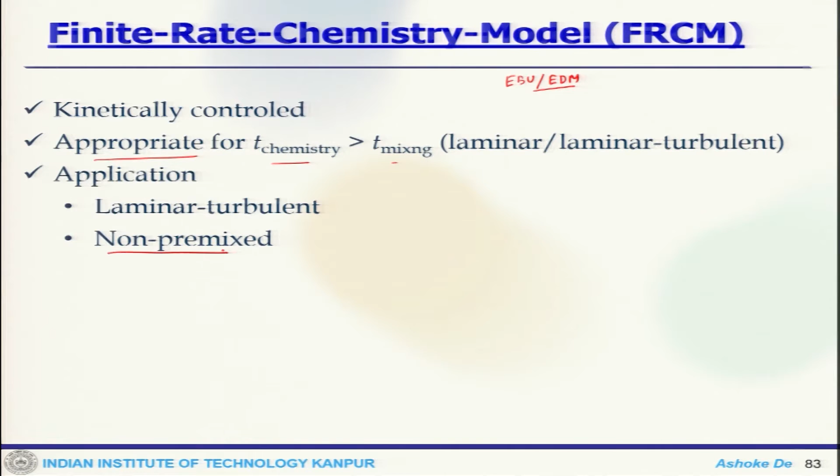Here there is an approximation if the chemistry time is higher than the mixing time, that means it becomes a laminar or laminar-turbulent interaction kind of situation. Now one can think about the applicability. It can be used in non-premixed mode, laminar case or turbulent case, either situation this is applicable. And the source term uses the Arrhenius expression.

We use the mean values for the temperature in the Arrhenius expression, but importantly in this case the effect of turbulent fluctuations are ignored. So this is one thing which would be missing when we actually close the source term.

Also when you look at the local temperature, that is also quite low. So compared to the previous models, these are some of the issues that come up here, that it does not account for those things. And also the consideration of non-equilibrium effects and all these things are also sort of missing.

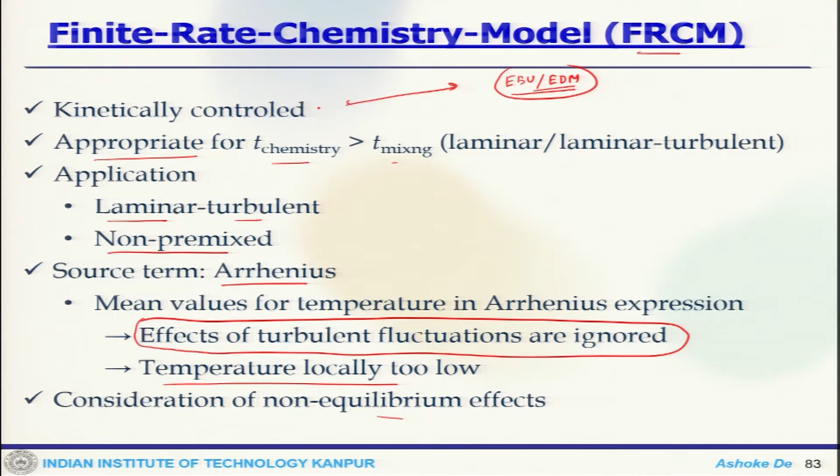So we have looked at the issues of EBU and EDM, and now EDM is more mixing controlled, FRCM is kinetically controlled. So these two are sort of contradicting each other. Now if one actually combines these two, that would probably be the best possible combination, which can be used for the application. So that is why we talk about this combination of EDM and FRCM.

So then we can use it for turbulent flow with high turbulence and intense mixing, and also if you have a laminar structure, that can be handled easily, because now we are trying to take the advantage of both these two models. So essentially the advantage of these two models are going to be used to somehow get this closed.

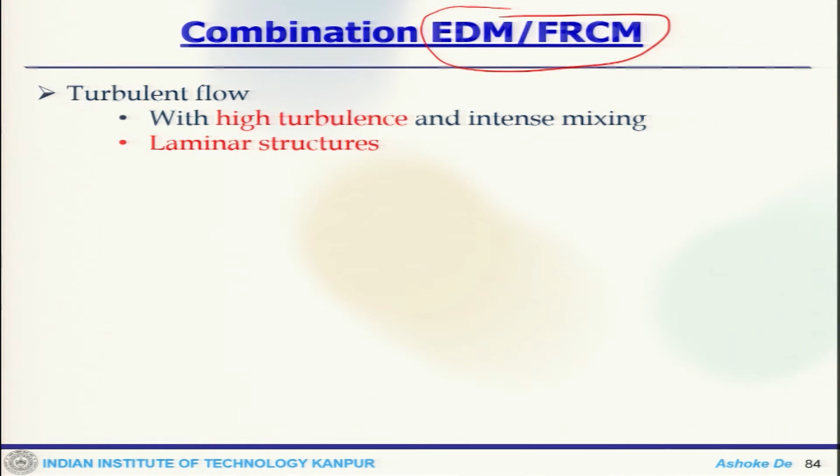Now when you combine these things, for each cell the computation for both the reaction rates are done. That means one is the reaction rate using EDM and the reaction rate using FRCM. Then we actually look at the smaller one to determine the reaction rate, picking the minimum or smaller of between the EDM and FRCM.

Then we look at the local chemistry and mixing control situation, which will allow us to choose what is supposed to be added along with this reaction source term, to take the advantage of whether it is a kinetically controlled situation or a mixing control situation.

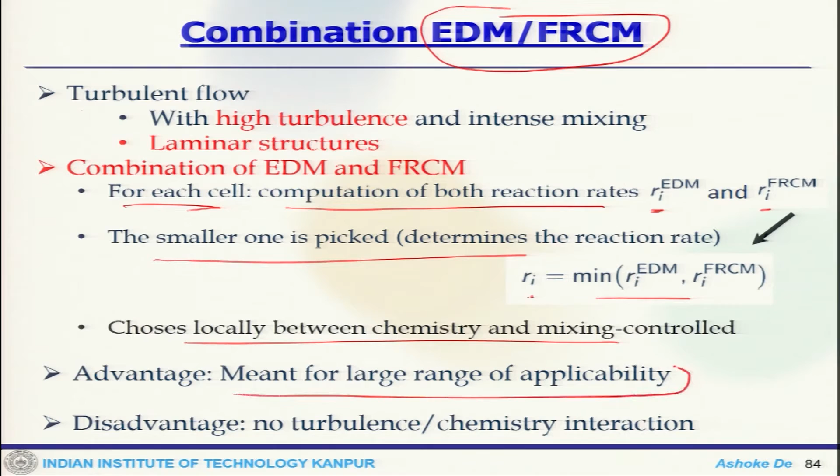So there are obviously some advantages and obviously you also pay some price. There is a large range of applicability. This is one of the biggest advantages, that once the applicability range or application range increases, that would be one of the best things one would expect to have.

But the other disadvantage is that there is no turbulence chemistry interaction. So though we are coupling these two models and taking the advantage of these two, there still remain some issues.

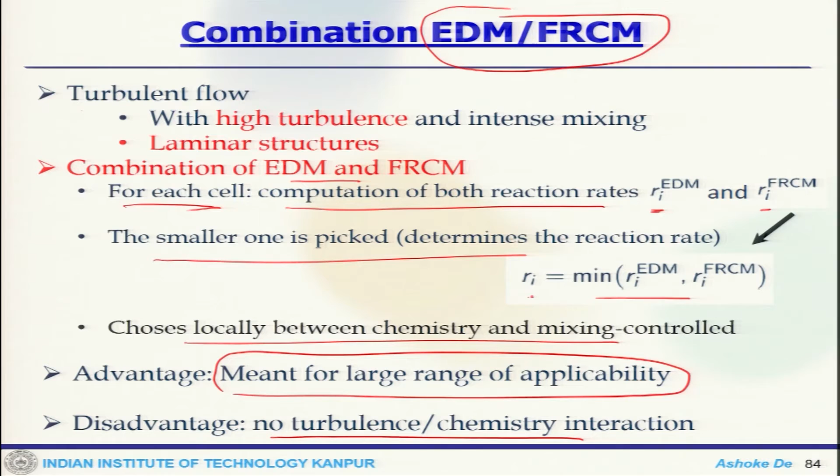So then the further modification which was proposed is the eddy dissipation concept, which is an extension of the EDM, where it does not take into account detailed chemistry, but now EDC can consider detailed reaction kinetics. That means it can take multi-step reaction chemistry into consideration.

So what it does is, if you have a computational cell like this, then you divide that into a small section. This is your reaction zone and this is your mixing area. So the cell is divided into two segments: one is the reaction zone, which is a fine scale structure, and the reactions are happening on the small scale, which is called the fine scale, and that is estimated like this. These are the C epsilon, the model constant, and the volume of the cell would be xi cube.

Reaction rates are determined by the Arrhenius reaction, because that takes into account all the detailed chemistry, and then the time scale of the reaction, which is also estimated as tau, given by C tau into nu by epsilon square root of that. This is also a model constant.

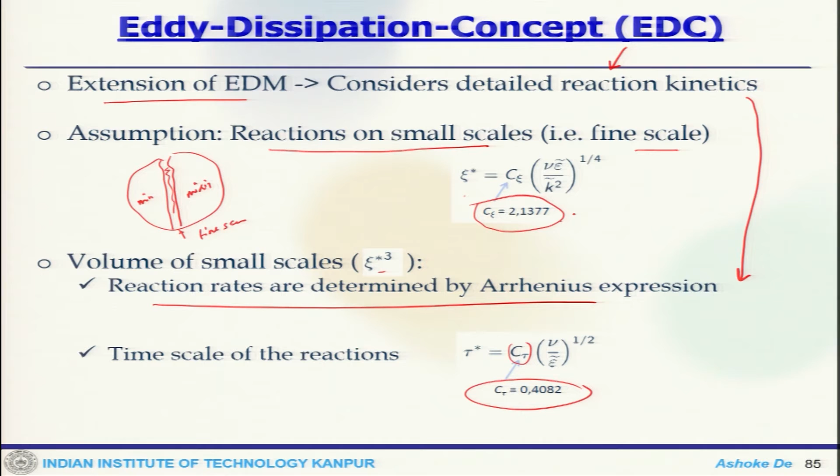These are the constants which are default model constants, originally proposed by the EDC model, but later it has been shown by different researchers that this requires some tuning depending on the particular application. More or less these constants work well for a large range of applications, but at the same time this can fail for specific applications that one has to deal with.

Once you have this, you need the boundary and initial conditions for the reactions. One assumption is that you have a constant pressure situation, that is, isobaric combustion, and then you need initial conditions which are quite important, for temperature and the species mass fraction or molar concentration, whatever it is.

Then we need the reaction time scale and then the numerical integration. One of the algorithms proposed by Pope is the ISAT algorithm, which is quite efficient when you get this numerical integration.

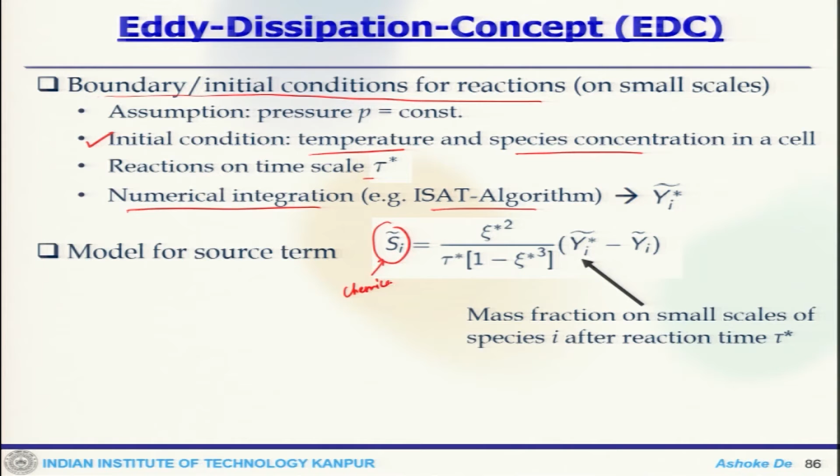Still, if you look at it globally, this has a huge advantage from the application point of view. It can be applied to premix case, non-premix case, or partially premix case, but it has problems when someone applies it using detailed kinetics and all these things.

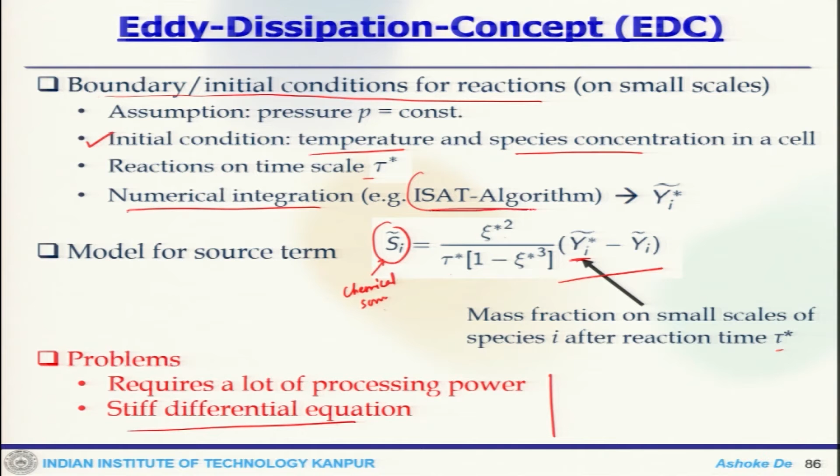Obviously when you use more detailed kinetics, your computational power requirement goes up, so the resource requirement becomes quite high. At the same time, integration of the reaction source term will lead to stiff differential equations when we try to integrate the species mass fraction. But there are ways to handle it, because these days computational power is quite handy due to advancement in architecture, though the differential equation solver remains an area of concern where the ISAT algorithm has been found quite effective.

Now, if we pull up the discussion of this first part, where we first look at laminar finite rate, the major issue here is that turbulence is not considered, and the reaction source term calculation is made by the Arrhenius equation.

Now if you go to finite rate or eddy dissipation, there again we use the Arrhenius expression for calculation of the source term, and we calculate the mixing rate - this is a local choice whether laminar or turbulent, depending on that it is used. Primarily in eddy dissipation, this is solely calculation of mixing rate - here kinetics is not considered, so this case is mixing controlled. Then finally we get the eddy dissipation concept, where the actual interaction between turbulence and chemistry is taken into consideration, and detailed chemistry can be used.

All said and done, this looks quite advantageous, and the applicability is also quite high because one can use this particular model irrespective of mode of combustion. The reason is it solves for individual mass transport equations, so that gives you simple models.

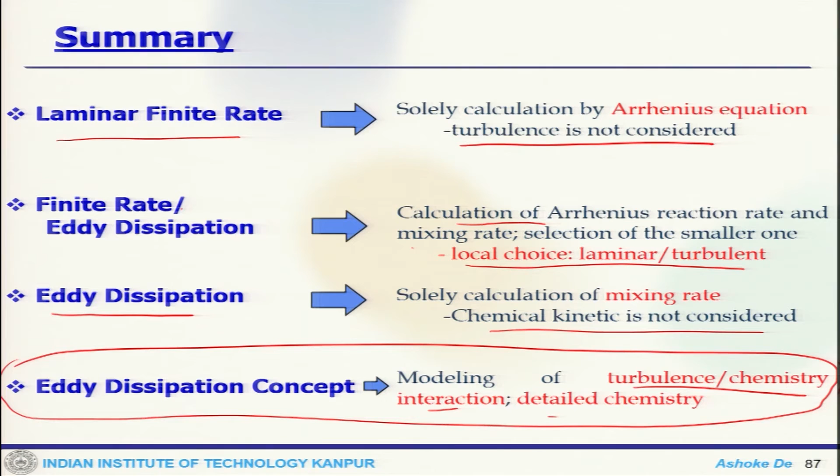Now we can look at slightly advanced models which are statistical based methods - that would be also quite handy. These models we discuss here can theoretically be applied to any mode of combustion, but with some advantages and disadvantages, whereas others are very specific to a particular mode of combustion.

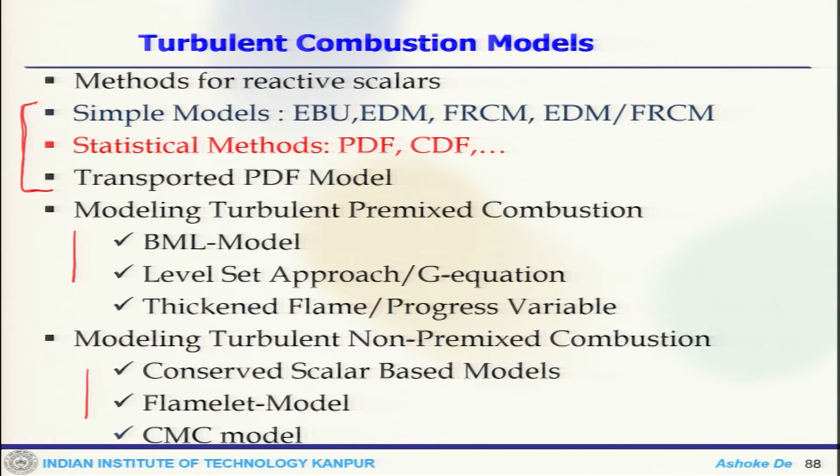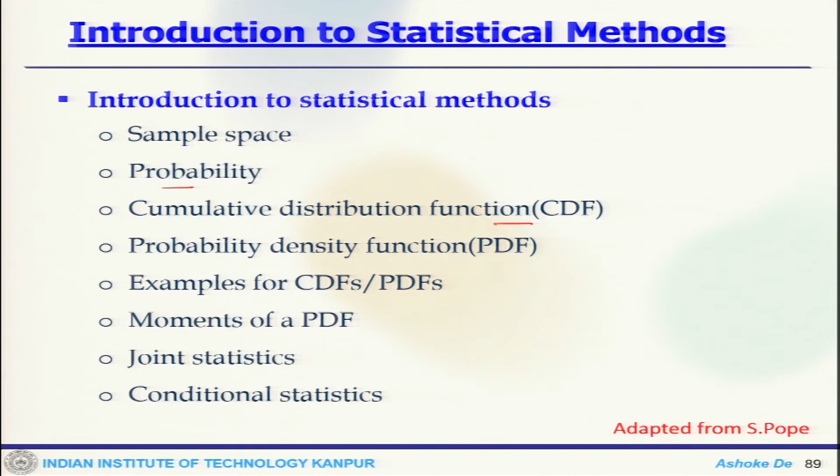Now we move to the statistical methods, where we look at what is the sample space, what is the probability, cumulative distribution function, probability density function, moments of PDF, joint statistics, and conditional statistics. These terminologies are required for statistical based models, and this is primarily adapted from probability theory. Now we can look at the probability of an event, the probability of an event in a sample space.

So, what is sample space? Sample space is nothing but the set of all possible events. Now, for example, for velocity field, you can think of a random variable u and then a sample space variable v, which is independent of the variable.

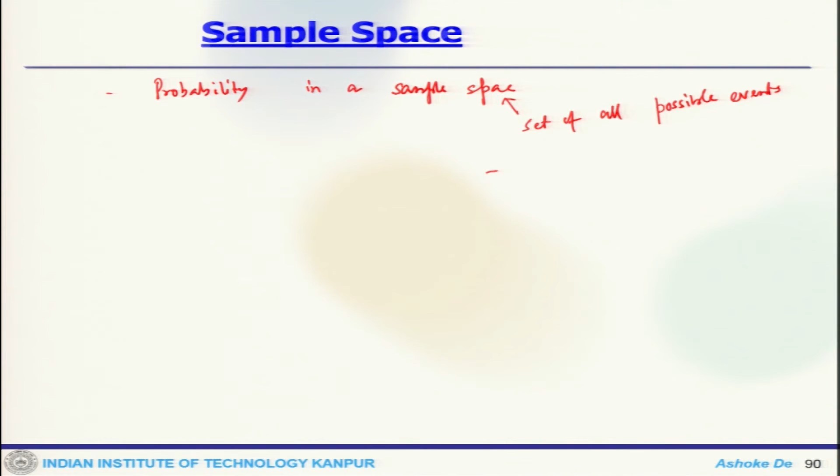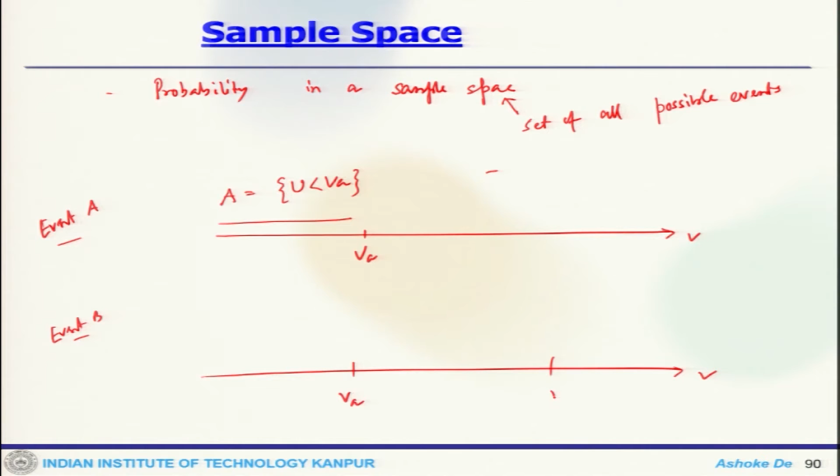Now, for example, if you take this as my sample variable v and this is event A, then A is where u is less than V A. Similarly, one can look at event B in this sample space, where V A and V B define event B, such that V A is less than V B. So, this is how you define the sample space.

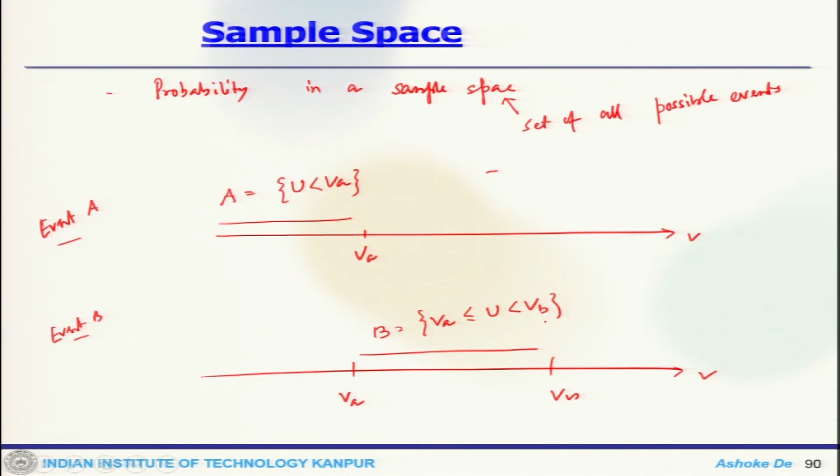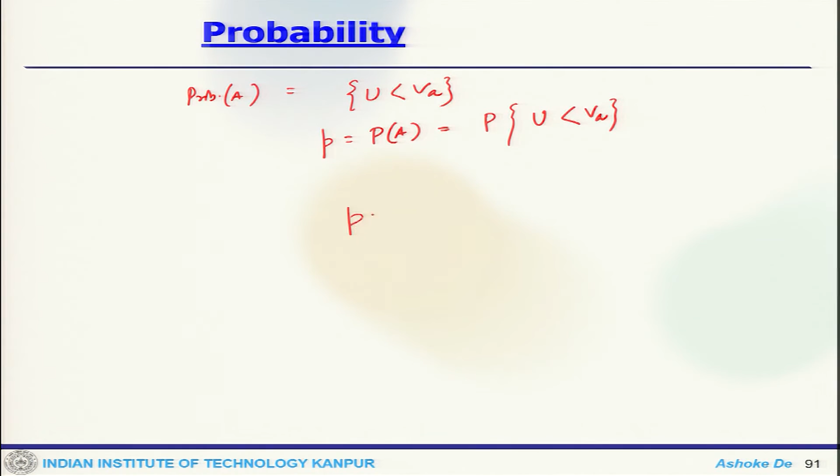Now, the probability of event A, P of A, is the probability of u when it is less than V A. The probability P lies between 0 and 1. When it is 0, that means it is an impossible event, and when it is 1, it is a sure event. So, that basically demarcates between the two sets.

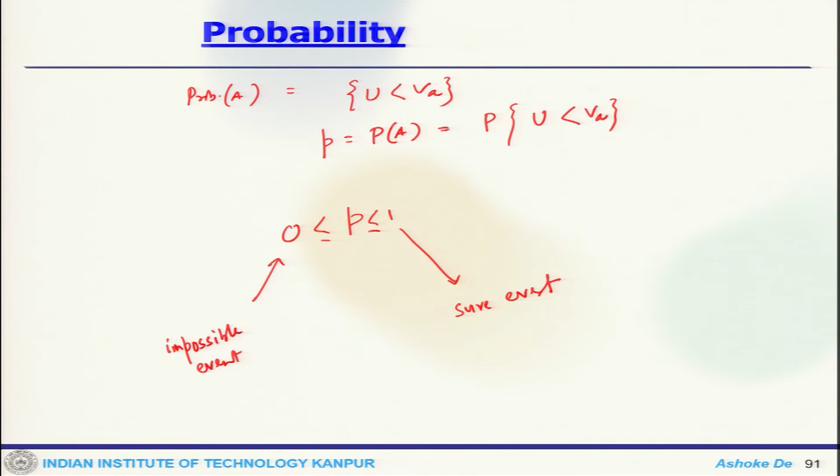Now, we look at the CDF, or cumulative distribution function. One can look at the probability of any event, which can be determined from the CDF. So, let us say P(A), which is the probability of u less than v.

Now, we looked at that, where V A defines my event A, such that u is less than V A. Then P(A), or probability of A, is P of u less than V A, which is the cumulative distribution function of V A.

Similarly, for event B, which lies between V A and V B, that is B equals V A less than or equal to u less than V B. That means u lies between V A and V B. Then P(B) is P of u less than V B minus P of u less than V A. So essentially it's a subtraction, giving f of V B minus f of V A. So, one can write two different probabilistic events in that way.

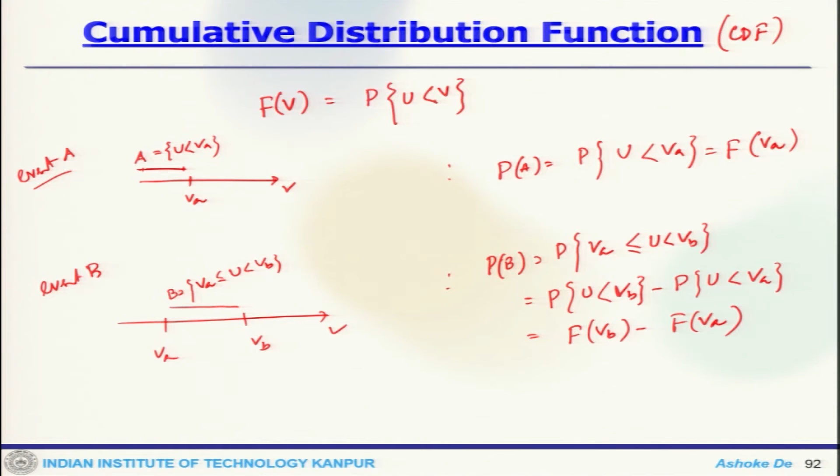So, there are some basic properties of CDF. Let us say the occurrence of the event where u is less than minus infinity is impossible, for which one can say f(minus infinity) is 0. Then the occurrence of the event where u is less than plus infinity is sure, for which one can write f(infinity) is 1.

And third, f is a non-decreasing function, for which one can write f(V B) greater than or equal to f(V A) for V B greater than V A, and one can write f(V B) minus f(V A) equals the probability of V A less than or equal to u less than V B.

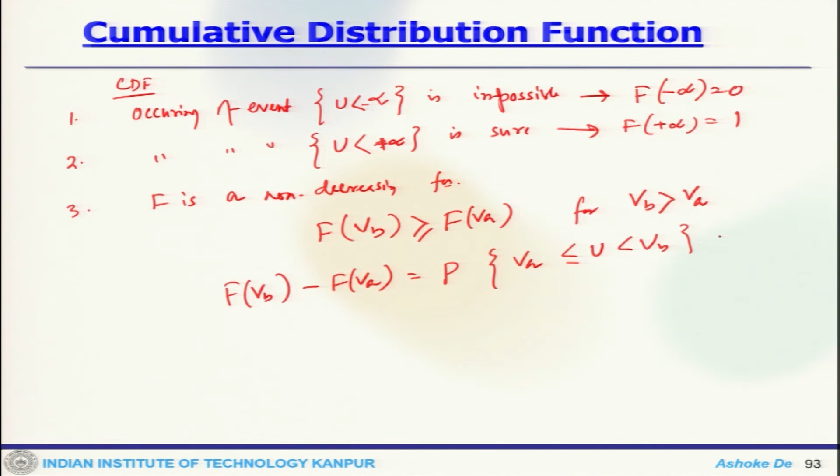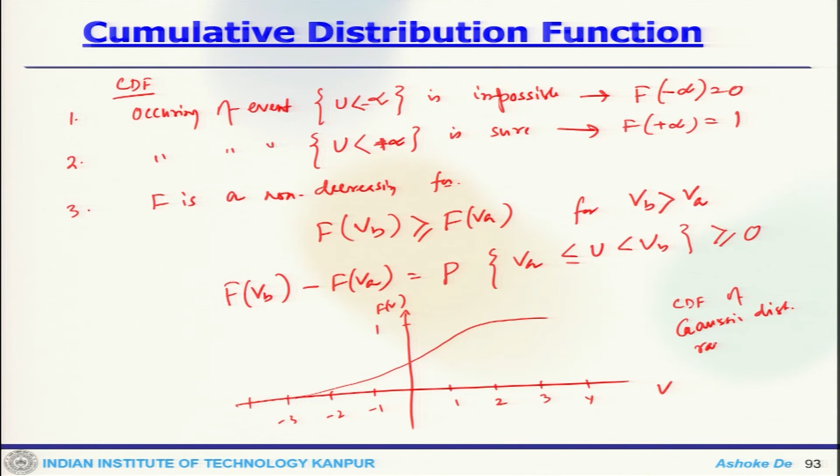Now, if we take the derivative of the CDF, that will give me the probability density function. So, f of small v is d/dv of F(v). So, this is my probability density function, which is represented as the derivative of my CDF.

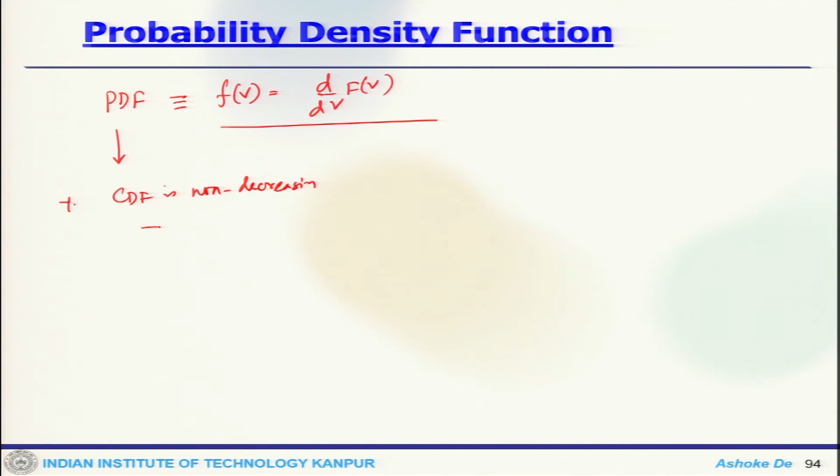Now, the PDF will also have some properties. One of the properties is that when the CDF is non-decreasing, the PDF, that is f(v), would be greater than or equal to 0.

Then it also satisfies the normalization condition, that means the integral from minus infinity to plus infinity of f(v) dv is 1.

Third, for an infinite sample space variable, you get f at minus infinity and plus infinity is 0.

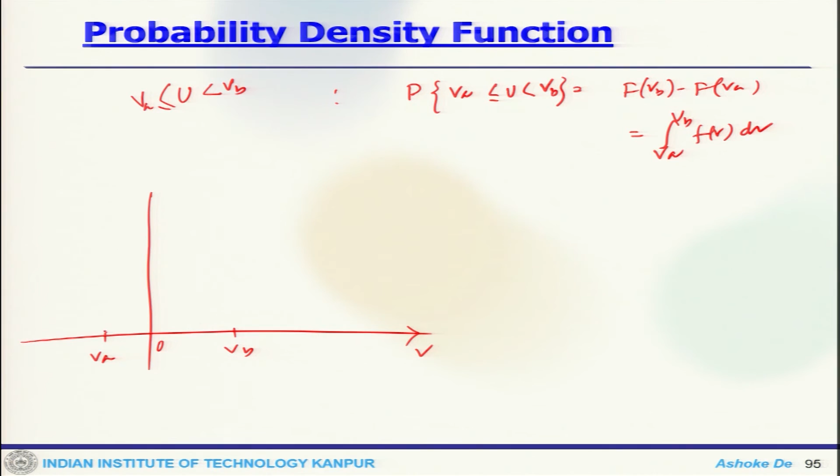So the probability was VA less than U less than VB, which was f of VB minus f of VA, that one can write as the integral from VA to VB of f(V) dV. So if I schematically look at it, this is 0, let us say VA, VB, and this is how the curve goes, let's say like that, that is 1, this is my F(V).

So this is my distribution of this guy, and the same thing when I put it back, this is my space V, this is VB, this is VA.

So this is the part which corresponds to the interval where VB minus VA tends to 0, the probability will be f(V plus dV) minus f(V), which is f(V) dV. So that is how you get the PDF.

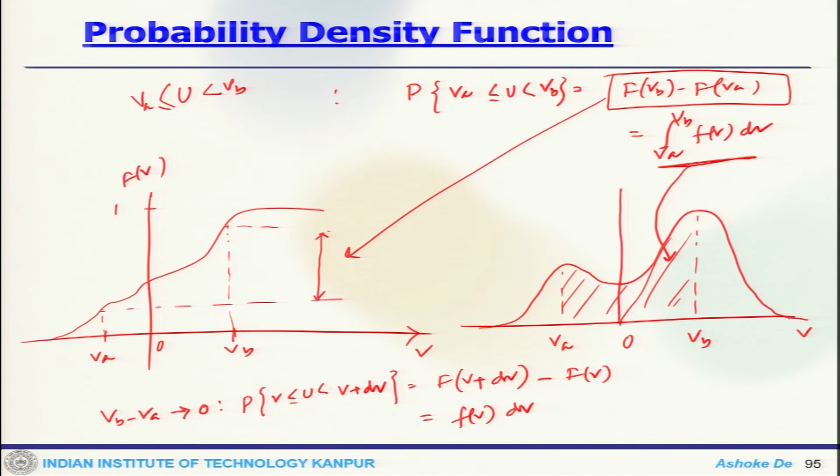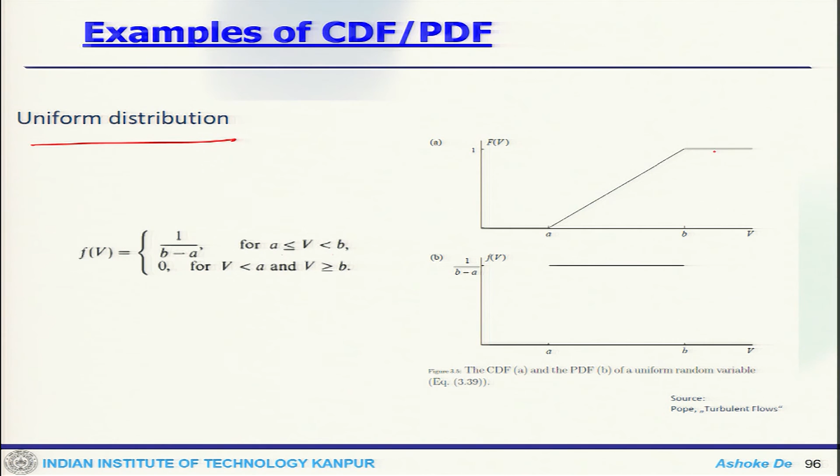Now you can take some examples, like this distribution of a CDF and this the probability density function. So this is a uniform distribution where probability distribution would be between A to B as 1 by (B minus A), otherwise 0. So this is how it looks like, and this is how the CDF variation is there. So this is a uniform distribution.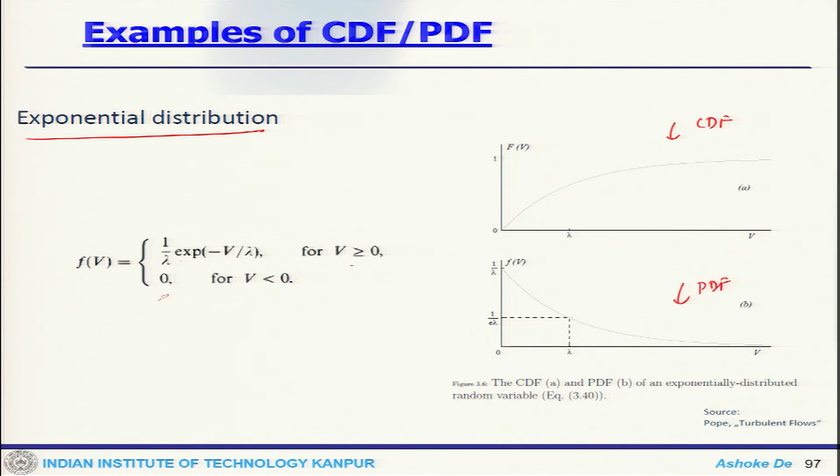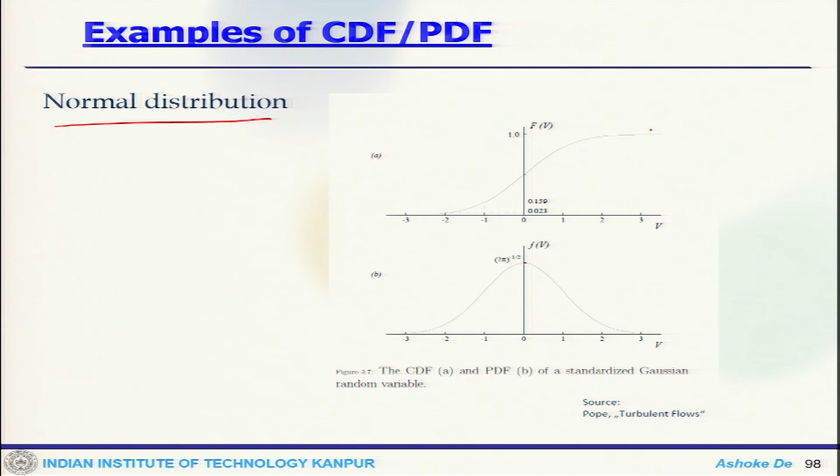Now this is a normal distribution which we have already seen, and this is the CDF variation.

Now, if you have, for example, a delta function distribution, that means the CDF is here, applicable here, applicable there. So that means for V less than A it is 0, A to B it is P, greater than B it is 1. So that is my CDF. So this can be written like a function.

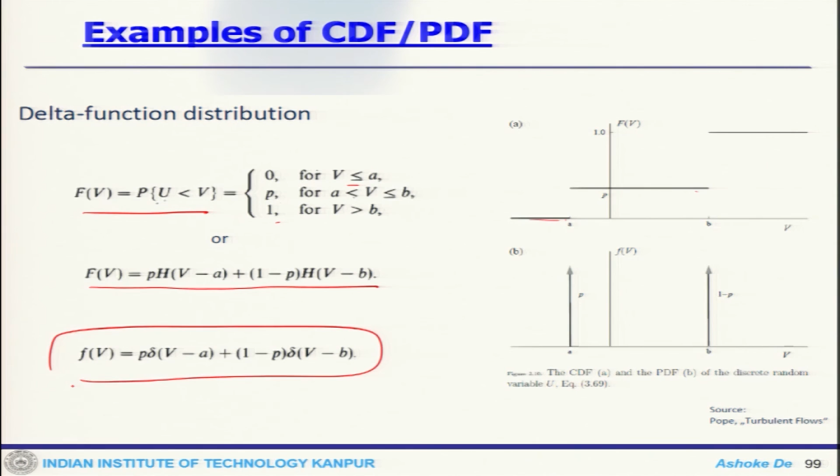Now the probability distribution at this point there would be a peak, and this point there would be a peak. So this is my probability distribution function of that, because now we can take, let us say, the PDF.

Of U is known, then we can find the nth moment. How do we find that? That nth moment would be V to the power n, f(V) dV, minus infinity to plus infinity, of Q V to the power n f(V) dV, which is the Q random function with Q equals to Q(U).

Now you can take the first moment, if n equals to 1, then this would be the mean of U. So the U bar would be minus infinity to plus infinity of V f(V) dV.

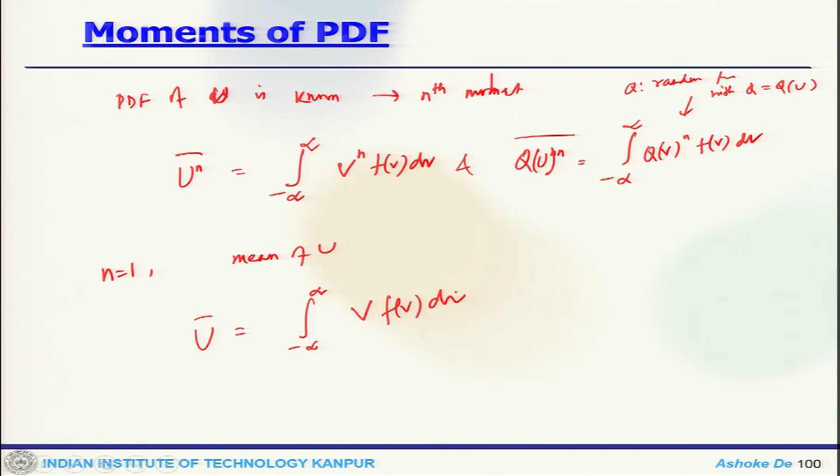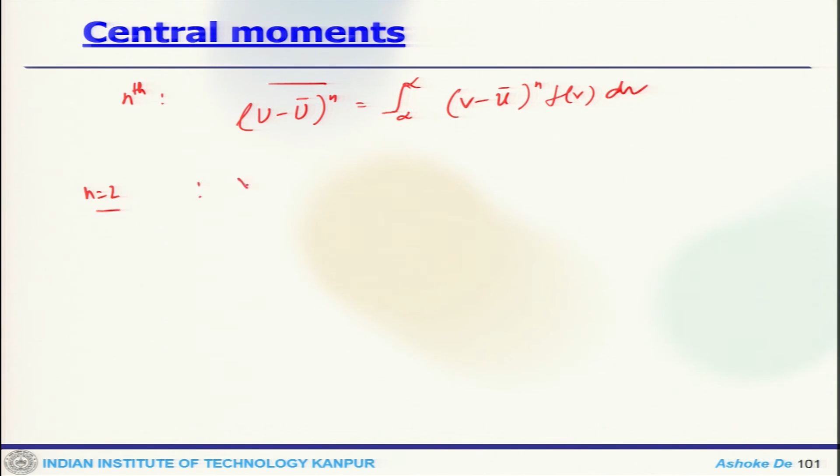Similarly, you can find the nth central moment, which is, let us say, (U minus U bar) to the n, integrated from minus infinity to plus infinity, f(V) dV. So for n equals to 2, which will give you the second central moment, which is essentially the variance of U, giving you U prime square equals (U minus U bar) square, which is the integral of (V minus U bar) square f(V) dV.

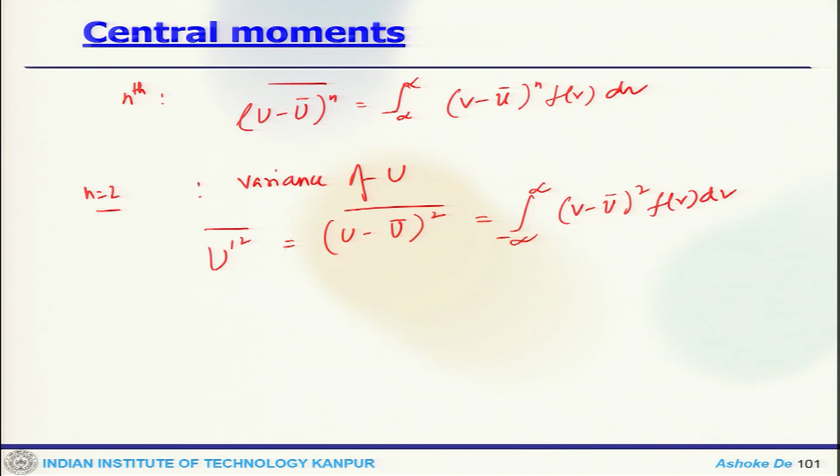So from the PDF you can find out all these moments. Now we can look at the joint cumulative density function.

So that is the joint CDF of random variables U1, U2 in general. So the joint CDF would be written such that U1 less than V1 and U2 less than V2. So this is a distribution of V1, this is a distribution of V2. So the joint CDF will belong in this particular space, because this is lower than V1, lower than V2, meaning it is dependent on two spaces.

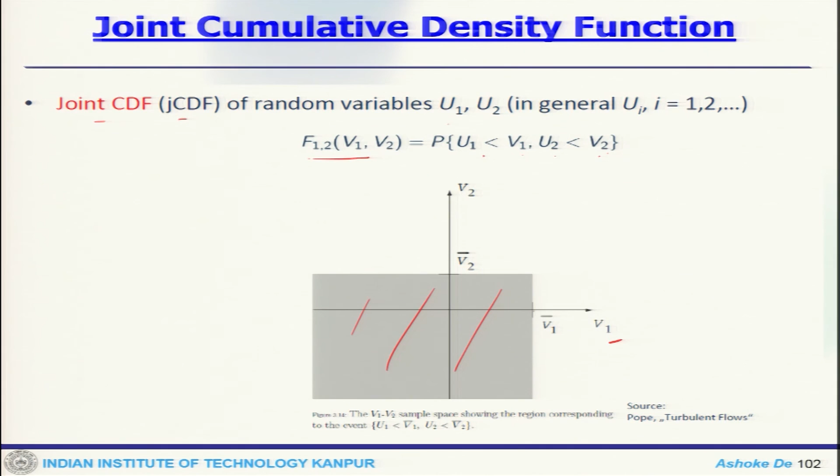Now some properties of that: this is a non-decreasing function, that means f12(V1 plus delta V1, V2 plus delta V2) is greater than f12(V1, V2) for all delta V1, delta V2 greater than 0.

Now since U1 less than minus infinity is impossible, this gives f12(minus infinity, V2) equals probability of U1 less than minus infinity, U2 less than V2, which is 0. Also U1 less than plus infinity is sure, so you get f12(plus infinity, V2) equals probability of U1 less than plus infinity, U2 less than V2, which will give you probability of U2 less than V2, that is f2(V2).

So one can think about a marginal CDF, which means f1(V1) equals f12(V1, infinity). So these are some of the properties of the joint CDF.